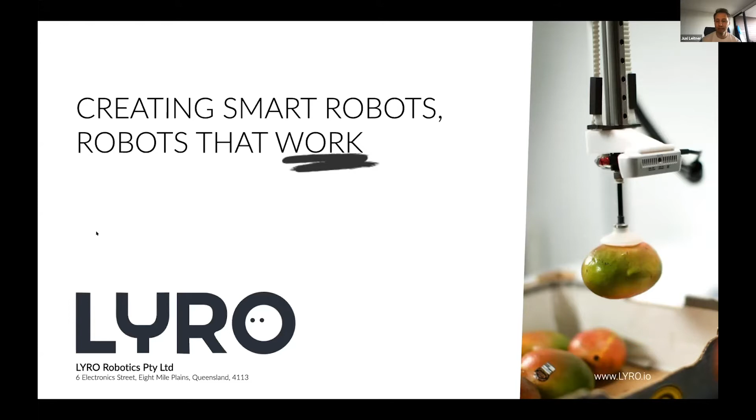So why do we care about 100,000 robots? There's a very large challenge going on right now, emphasized by the whole ongoing global situation: how do we build secure, safe, and reliable supply chains? That's not a simple task. Specifically here in Australia, especially in agriculture, one of the leading industries, you have a high number of transient labor force, more than 50% in some cases, and a lot of these positions unfilled.

Right now, there was an EY study that came out just a couple of weeks ago: there's 26,000 jobs unfilled. That's not just 26, that's 26,000. Other studies basically say more than 50,000 part-time visa holders have not entered the country recently. So there's a very, very large number of people currently not here to do jobs, specifically in the supply chains we're relying on.

Same thing with online sales, 17% year-on-year growth, and that was before this year. This year you actually see this step function in February, March, when all of a sudden everybody started ordering online. So we need to solve these big problems. Robotics has historically always claimed to solve big problems, but now we actually need to do it, and we need lots of robots to do it.

We don't just need one robot or three robots out there helping us do things. We need 100,000 robots out there. And we've seen more and more people getting into that. Advanced robotics, a catch-all term for modern robotic systems — Industry 4.0, machine learning, intelligent systems — has seen 21% growth. Especially given the pandemic, we've seen an incredible surge of interest in no-contact packing. Some outbreaks globally have actually happened in food processing plants, which is not particularly good. So how can we help with robotic systems?

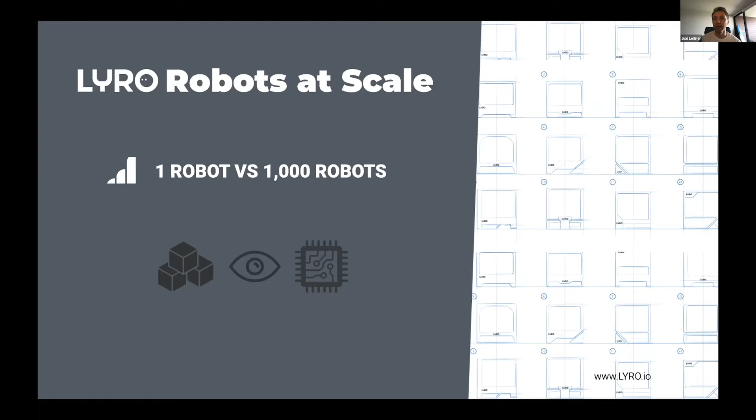It's not the robotic system that you're selling. What is the product? And we at LYRO basically looked back at what is it that we can do. And we developed and deployed the world's first fresh produce pattern packing robotic system.

That's a bit of a mouthful, but what that actually allows you to do is quite literally any vegetable, any fruit, we can pick up with our robotic system. We can place it in any pattern, whether that's how you find it at Woolies or any other supermarket, or if you need to put it into a shipping container. And we can do that at any time.

How we built that? We're building that based on what we call LYRO machine intelligence. But the critical part here is not the LYRO machine intelligence. The critical part is how to build these robotic systems that can actually have this broad applicability, because I think that's the only way that we can solve these large-scale problems out there.

You can see some on the bottom there. There's a few videos here as well.

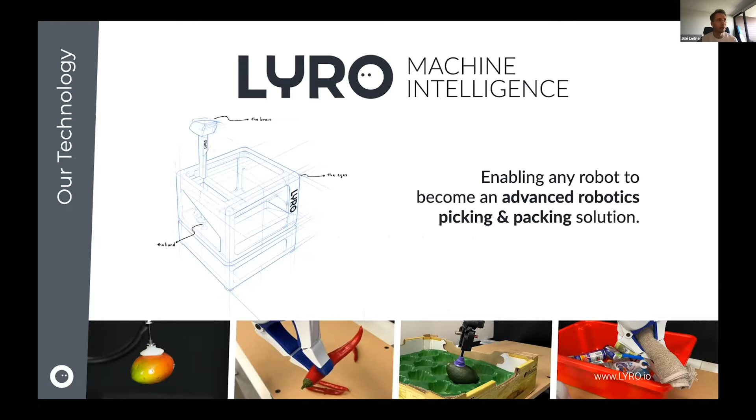Over the last couple of months, as LYRO, we are a pretty young company. We spent a lot of time trying to robustify the underlying technologies, the underlying research that came out of the center, to actually allow us to work in different industries.

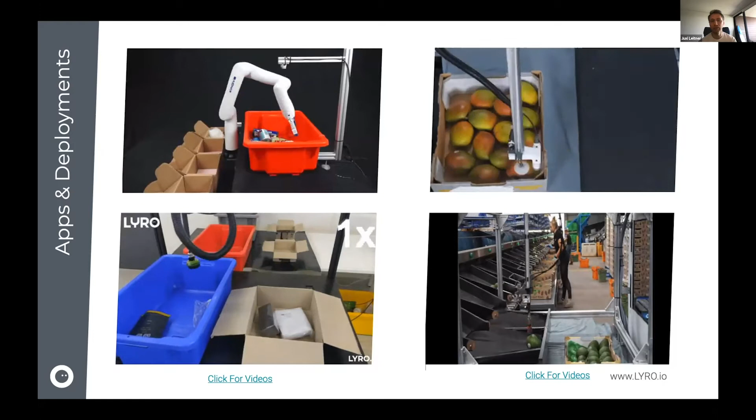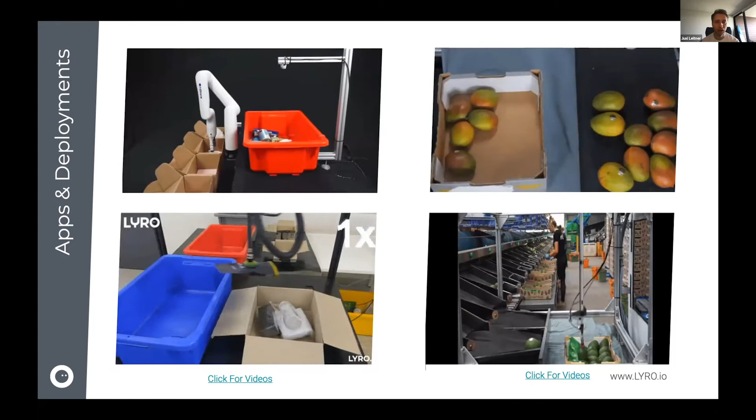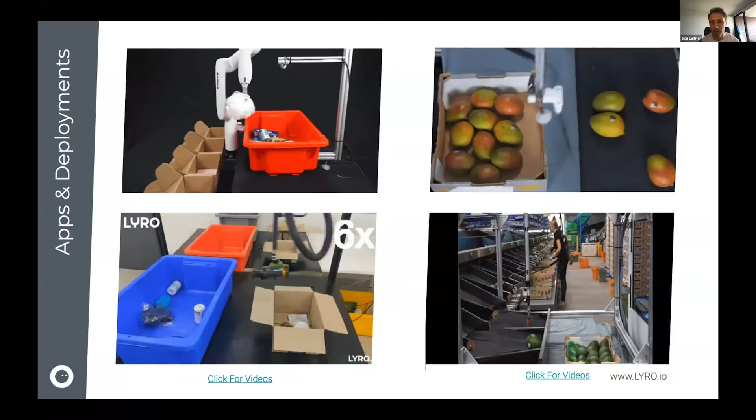So on the top, you can see e-commerce on the left and agriculture on the right, working on different robotic systems. Very similar, again, on the top you have a Kinova arm from a Canadian company. On the bottom, that's LYRO Generation 2 robotic system that does e-commerce fulfilling. And we trialed these things out in commercial settings as well, right? You have to get out of the lab and do these things. So this has really been a bit of a focus for LYRO for the last couple of months.

So how does that actually tie in with the technology that we've developed at the Center for Robotic Vision, and how does that tie in with transferring that into an application area?

I started doing that during my PhD, and I like Jeff's comment on getting smaller and smaller robotic systems. My 2000-ish master's thesis was on swarm robotics, and the whole idea there was, can we build smaller, more agile robotic systems to get them out there.

But over the last couple of years, it was really focused on, can we get an understanding of the world from computer vision? And at LYRO, we are basically taking this and trying to put it into a product where, yes, the robot needs to understand the world, and yes, the robot needs to pick the world, but from a customer point of view, the robot just needs to work. And that's really what we're trying to do.

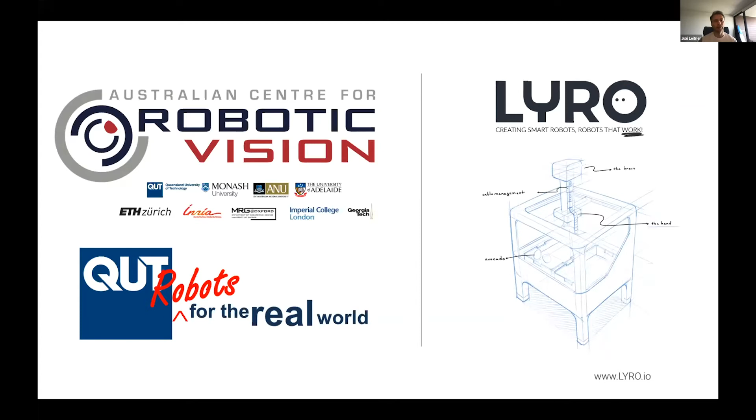For LYRO, we started with a lot of the solutions and technologies that came out of our Amazon Robotics Challenge win. It's a robotic system that we built in-house, tech stacks that we've developed at the center over lots of years, partly accidental, to make lots of different students work with different robotic systems. But it's a highly modular and functional design where we have lots of different AI and vision stacks that work together, multiple camera systems if needed, multiple gripper systems if needed, and really bring them together into one nice package.

For us, the Amazon Challenge, both challenges that we entered, was really, from an academic point of view, more a showcase and a student project than actually a research project. So it's a lot of engineering and education, but not necessarily research. But that was really the foundation that allowed us to say, well, there's actually an impact we can have with these technologies in the outside world, beyond just your fundamental research agenda, on a broader scale.

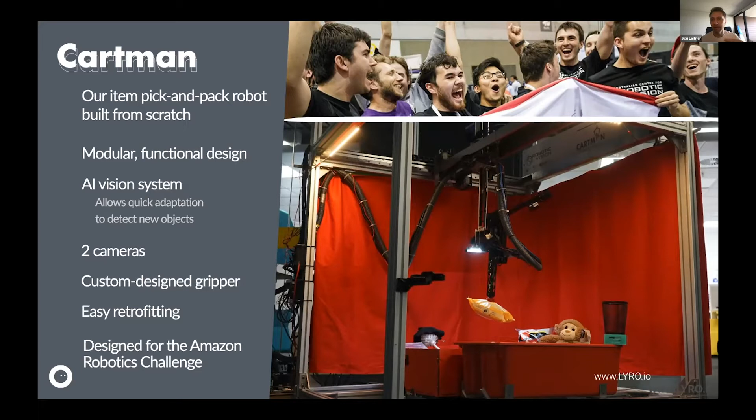So what part of technologies are actually in there? I guess that's one of the interesting things for academics and early career researchers out there. When you're in academia, you don't tend to think about the whole system as your research agenda. You think about different parts.

In grasping, my background is in grasping, it comes about picking, moving, and packing. These are the more fundamental actions or blocks, if you will, that we need to stick together to build a system. A lot of these things were developed at the Australian Center for Robotic Vision, or even a long time ago with the iCub that I did during my PhD, probably a decade ago by now, on reactive reaching and grasping, where we used a very similar leap motion sensor that William showed. It's good to see that academic research translated into industry.

But really the focus there was on small scale issues. How do I synthesize a grasp point? Lots of research work goes into that. How do I do vision-in-loop grasping? We have papers, both with ACRA and ICRA and so forth, that specifically focus on these parts. All these things are crucial and very important. But from a research point of view, you look at them in separate parts or in isolated silos, because that allows you to compare your results, benchmark your results, and publish your results.

But as I mentioned before, the APC and the ARC were really the first moves where we started to bring these things together. The research focus for LYRO is on bringing these things together, focused on the gray area that brings these things together and goes more towards packing, which is the application, away from each initial part. A lot of time was spent on how do I take research code, or any open source code, whatever the latest craze is in computer vision, and see - can I use this? Can I modularize this? Can I put this on a robotic system? What are the benefits for the application area? A lot of time was spent building these fundamental systems.

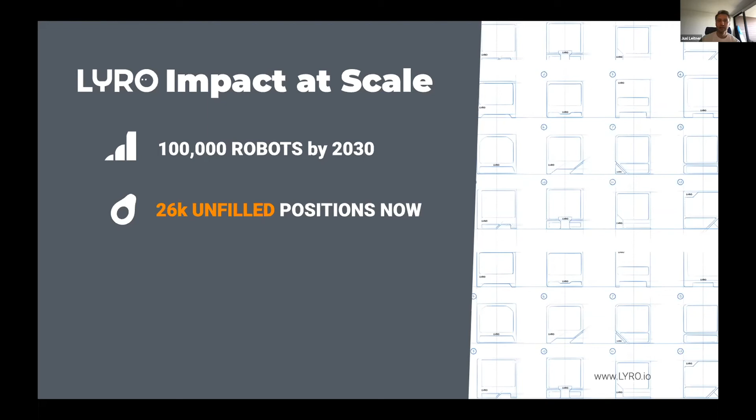So in short, how do we get there? We're working on it, it's a long road. What we want is 100,000 robots out there. In other terms, that's like 50 million grasps an hour, if you want another large number.

We want to deal with a wide range of objects, from just 0.01 kilo to 3 kilos - that's just a range. We're really focusing on things where we can have a large impact right now. Obviously you want to pack these things into different sets of boxes that are everywhere, from Amazon boxes on the left to stock standard boxes, which turns out to vary significantly globally. So there's a lot of challenges there.

A lot of these things we can solve by bringing in fundamental research. But for a company, for us as a startup, we need to look at how to bring them together in a smart way so we can actually build reliable solutions.

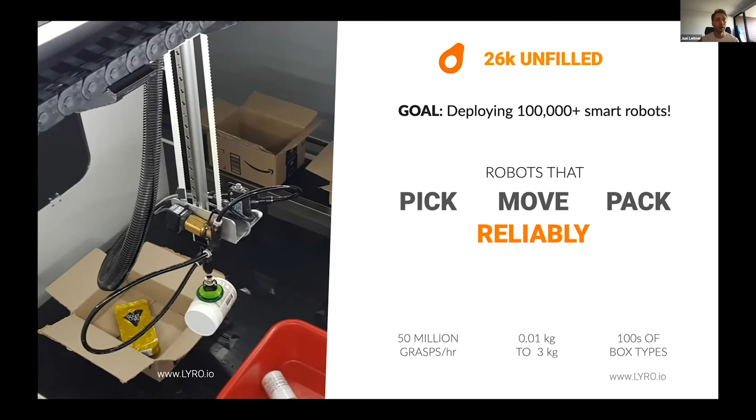Live, okay. Juxi, thank you so much. Very, very cool stuff. Congratulations on the success of LYRO.

Regarding that, I have a question, actually my own question. Do you think your success in the Amazon Robotics Challenge played a role in the existence and creation of LYRO? Or if you had just done well but not been at the top like you were, would LYRO still exist? What are your thoughts on that? Just a non-technical question here.

So, a very good question. I think LYRO would not exist without the Amazon Robotics Challenge. For me personally, it was one of those moments where it clicked and I realized that all these technologies are cool by themselves, but we actually have a way to stick them together, and we can have an impact outside of academia, an impact in society and economically with that solution. So for me, that was a click.

That click would have probably also happened if we were not number one, but access to media and capital does help if you're winning a global competition. So it would have probably been a longer and harder road to raise our initial funding. But there are two sides to it. I think it's fundamental for me because it allowed me to stick things together and see that they actually work.